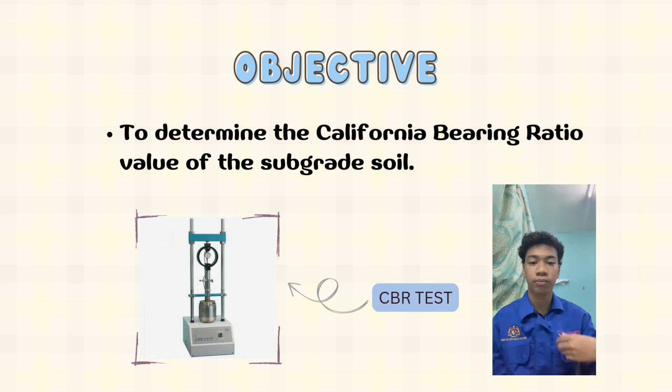Sebagai teori, ujian California Bearing Ratio iaitu CBR dijalankan bagi menilai kekuatan tanah subgrade untuk tujuan reka bentuk turapan jalan. Dalam ujian ini, sebuah penumbuk pelangga berdiameter 50 mm digunakan untuk menekan sampel tanah pada kadar penembusan iaitu 1.25 mm per minit. Bacaan beban diambil apabila penumbuk mencapai penembusan sebanyak 2.5 dan 5.0 mm. Nilai CBR ditentukan berdasarkan peratusan beban yang diukur berbanding dengan beban piawai bagi bahan rujukan. Nilai yang lebih tinggi antara bacaan pada penembusan 2.5 dan 5.0 mm akan digunakan sebagai nilai CBR akhir.

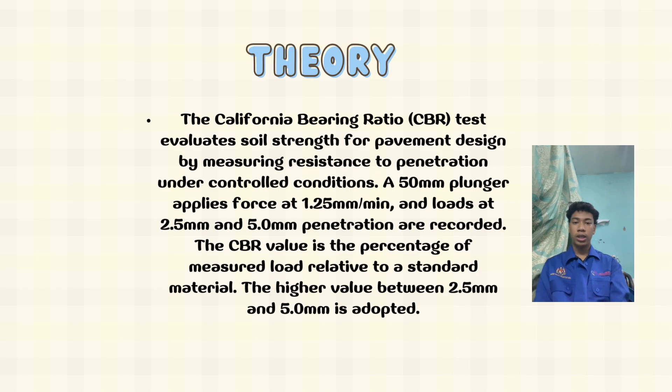Saya akan menerangkan jadual iaitu standard load for different penetration. Jadual ini menunjukkan beban piawai iaitu standard load yang digunakan dalam ujian CBR bagi setiap tahap penembusan iaitu penetration pelangga ke dalam sampel tanah. Untuk penetration mm iaitu lajur pertama, ia menunjukkan sejauh mana penumbuk pelangga yang menekan masuk ke dalam sampel tanah.

Ujian ini biasa direkodkan pada bacaan seperti 2.5, 5.0, 7.5, 10.0 dan 12.5 mm seperti merujuk pada jadual masing-masing.

Pada lajur kedua pula ialah standard load dalam bentuk kg. Ia merujuk pada beban rujukan yang digunakan untuk membandingkan keputusan ujian sebenar. Ini adalah beban yang diperlukan untuk menembusi bahan piawai, selalunya menggunakan batu hancur pada kedalaman yang dinyatakan.

Pada lajur ketiga pula ialah unit standard load iaitu kg per cm persegi. Ini adalah nilai beban per unit luas permukaan tekanan. Ia digunakan untuk menganalisis tekanan tanah dengan lebih terperinci.

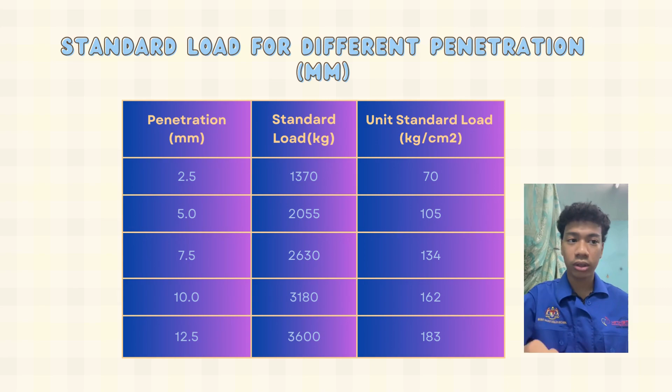Seperti kita tengok pada lajur kedua standard load, ia bermula dari 1370 hingga 3600, merujuk pada peningkatan. Untuk unit standard load pula bermula daripada 70 hingga 183, ia juga menunjukkan peningkatan. Okey, itu sahaja.

Akhir sekali saya akan menerangkan bahan-bahan yang digunakan untuk CBR test. Yang pertama adalah silinder mould yang berdiameter 150 mm dan ketinggian 175 mm.

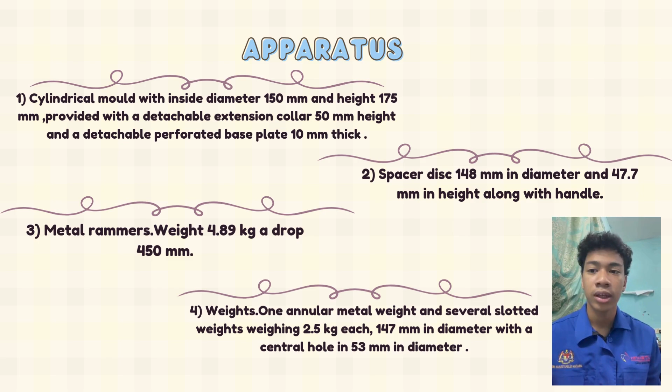Yang kedua ialah spacer disc. Yang ketiga adalah metal rammer. Yang keempat adalah weight, one annular metal weight. Yang kelima adalah loading machine yang berkapasiti sekurang-kurangnya 5000 kg.

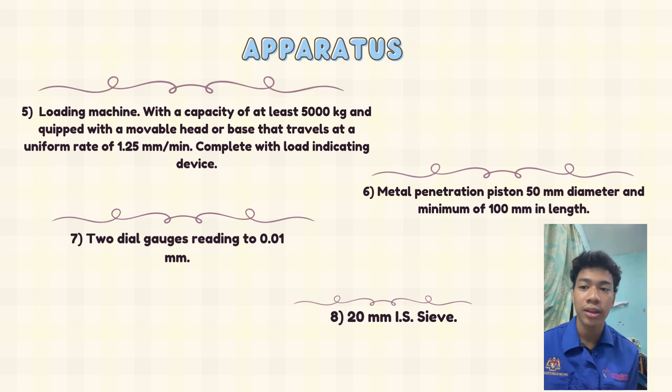Yang keenam metal penetration piston. Yang ketujuh adalah 2 dial gauge reading to 0.01 mm. Dan yang ke-8 adalah 20 mm IS sieve.

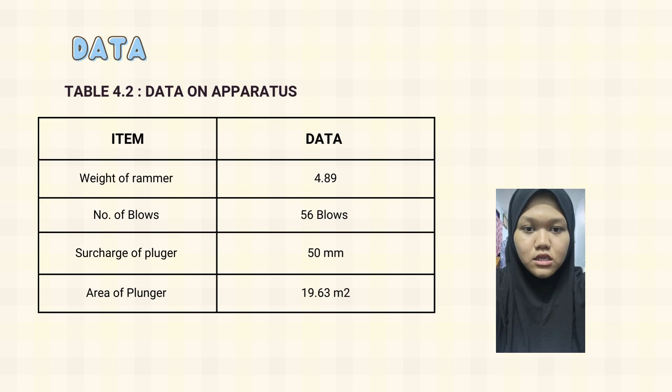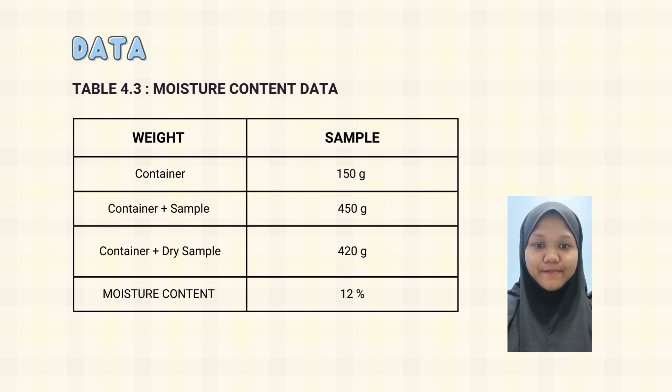Lastly, area of plunger is 19.63 square meter. Moisture content data: weight of the container, we get 150 gram. Container with a sample, we get 450 gram, and container with a dry sample, we get 420 gram. To find the moisture content, it has its own formula. The formula is weight of the container minus the dry weight, divided by dry weight, multiplied by 100%, and we get 12%.

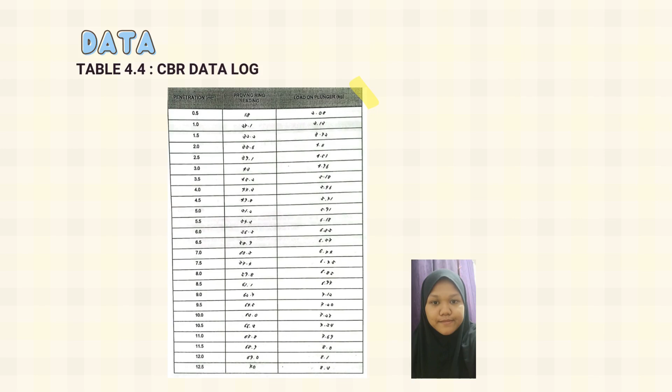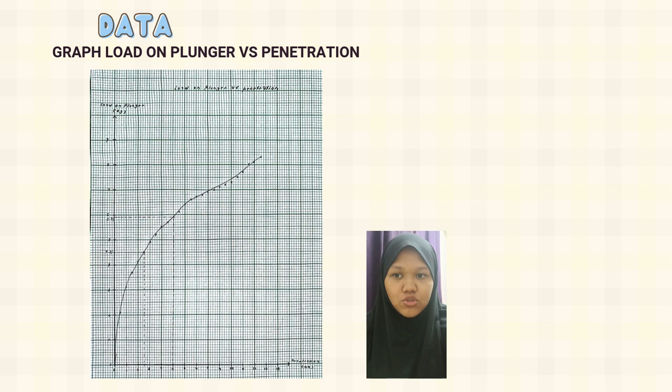So, this graph shows the load on the plunger and penetration. The x-axis represents the penetration in mm, while the y-axis shows the load on the plunger in kg. Based on the graph, the increase in load with penetration shows the resistance of the soil. The shape of the graph is important for determining the CBR value, which is used to assess the soil strength for road engineering purposes.

Lastly, regarding the CBR result analysis, this table shows the conclusion of the California bearing ratio for the soil sample test. The analysis is based on the penetration values of 2.5 mm and 5.0 mm. For the 2.5 mm penetration, the standard load value is 1370 kg, and the load value from the graph is 4.51 kg. For the 5.0 mm penetration, the standard load value is 2055 kg, and the load value from the graph is

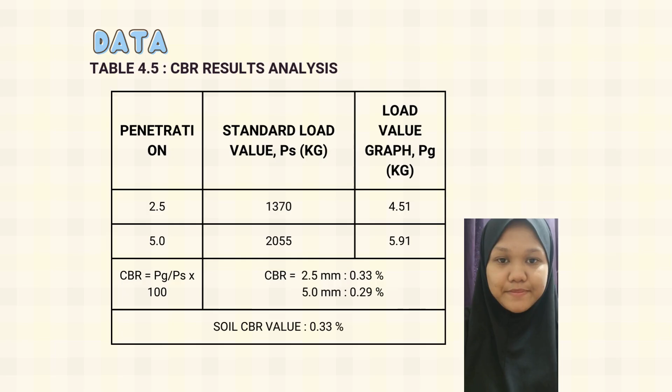5.91 kg. These values are determined using a formula, which involves dividing the load values obtained from the graph by the standard load value and then multiplying the result by 100. The final CBR result is 0.33%.

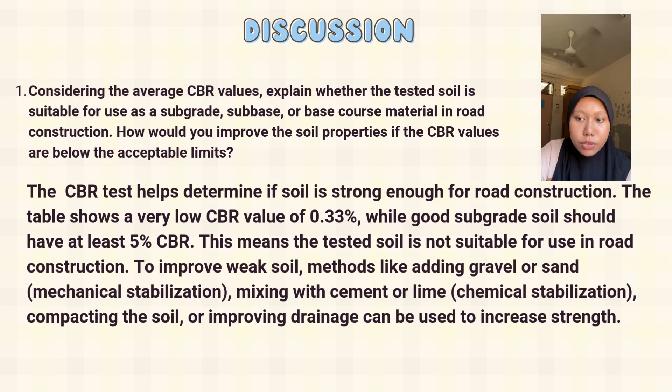So for number 2, explain how the CBR results are applied in designing pavement thickness. Why is it important to perform both soaked and unsoaked tests for pavement materials in real-world conditions? CBR values help engineers decide how thick the pavement should be. Lower CBR means thicker pavement is needed to support traffic loads.

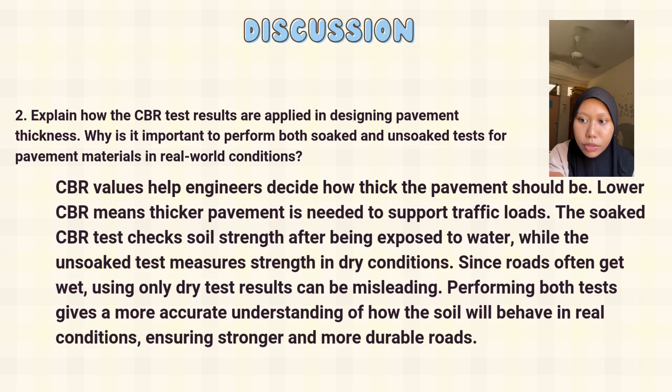The soaked CBR test checks soil strength after being exposed to water, while the unsoaked test measures the strength in dry condition. Since roads often get wet, using only dry test results can be misleading. Performing both tests gives a more accurate understanding of how the soil will behave in real conditions, ensuring stronger and more durable roads.

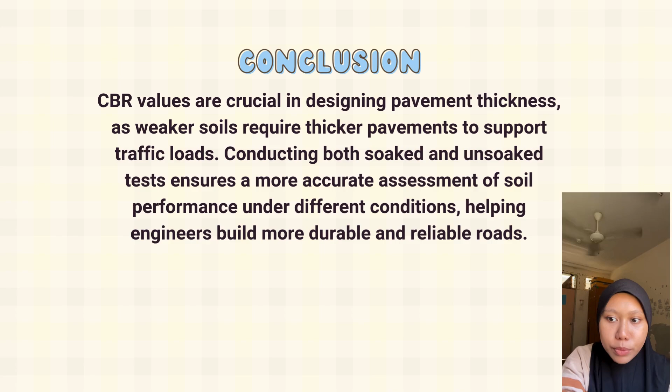So for the conclusion, CBR values are crucial in designing pavement thickness, as weaker soils require thicker pavement to support traffic loads. Conducting both soaked and unsoaked tests ensures a more accurate assessment of soil performance under different conditions, helping engineers build more durable and reliable roads.